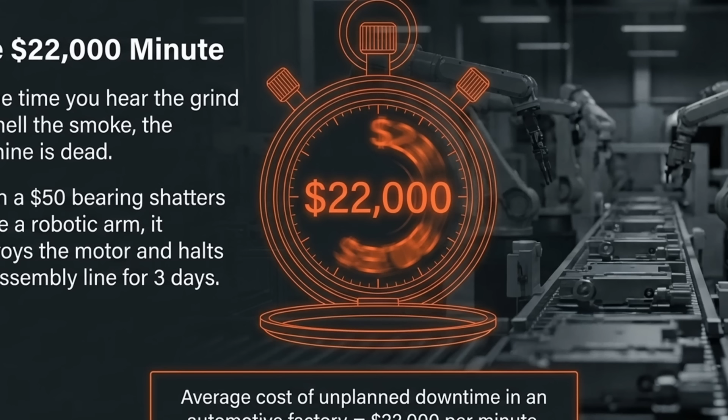single minute. But what if a machine could call a mechanic and order its own replacement parts 3 months before it actually breaks? It sounds like science fiction, but it is happening right now. Today, I am going to show you exactly how engineers are using acoustic sensors and artificial intelligence to let machines predict their own deaths, and why the old way of fixing things is bankrupting companies.

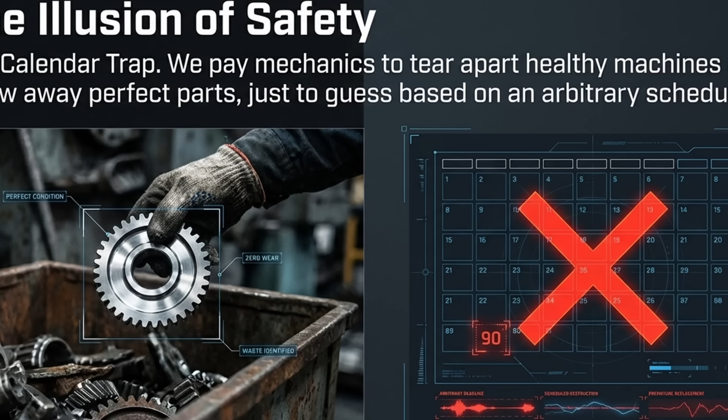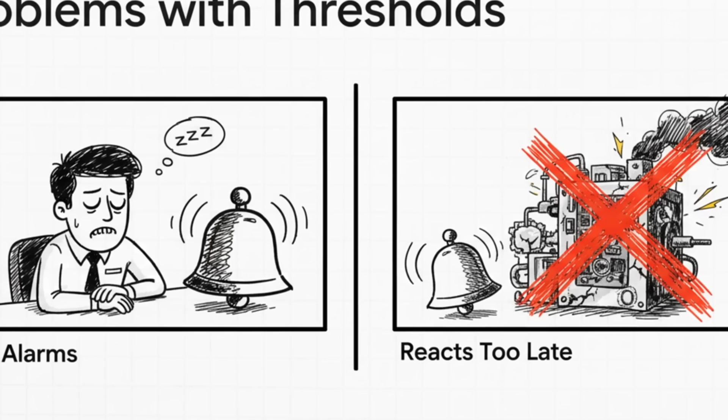How do most factories maintain their equipment? They guess. They use a calendar. They say change the oil and bearing every 90 days. This is called preventive maintenance and it is a massive financial trap. Why? Because you are constantly throwing away perfectly good parts. You are paying mechanics to tear apart healthy machines just to be safe. You are spending millions of dollars fixing things that aren't actually broken.

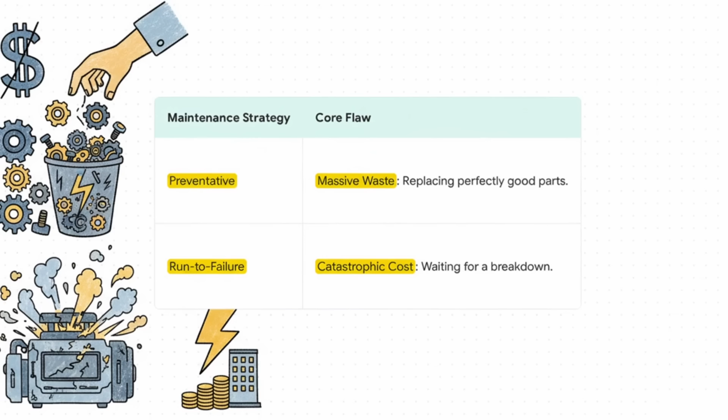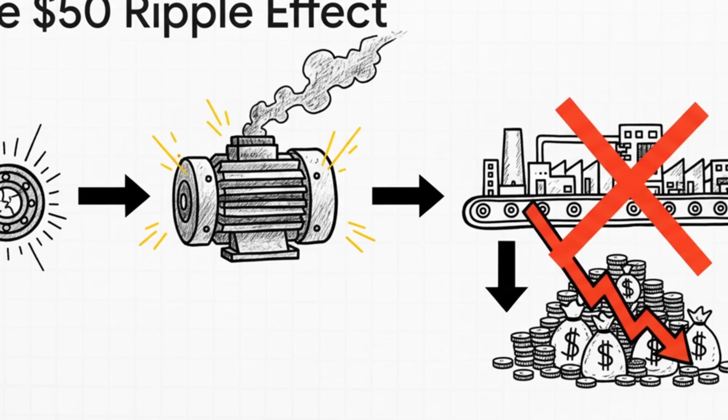But the alternative is even worse. The alternative is run to failure. You wait for it to break. But in an automotive factory, a single minute of unplanned downtime costs an average of $22,000. If a $50 bearing shatters inside a massive robotic arm, it doesn't just break the bearing, it destroys the motor, shreds the casing, and halts the entire factory for 3 days. You don't just lose the cost of machines, you lose the revenue of every product you couldn't build.

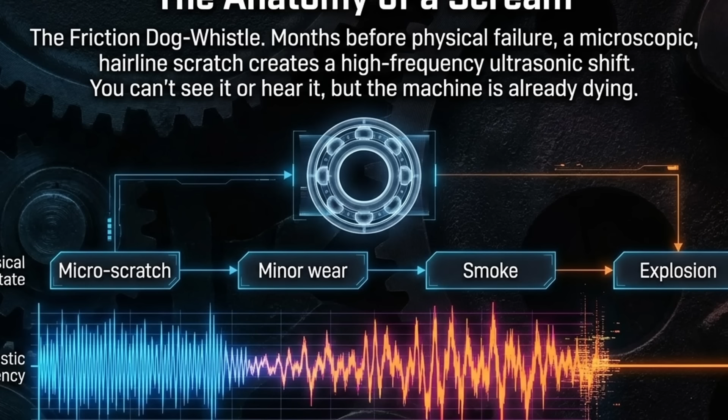We need a way to look inside steel while it's moving, and that is where the microphones come in. When a piece of metal gets a microscopic scratch, it creates friction. That friction emits a high frequency ultrasonic sound wave like a dog whistle. Engineers now attach ultrasensitive acoustic microphones directly to the metal. These sensors listen to the machine 24/7. When the machine is perfectly healthy, it hums a specific mathematical baseline tune. But the exact moment a microscopic scratch forms, months before it actually fails, the frequency of the sound wave shifts. The machine starts to cry.

But there is a problem. A factory has 10,000 machines, all vibrating at once. A human mechanic can't listen to a wall of noise and find one scratched bearing. This is why we need AI. The artificial intelligence acts as a digital doctor. It processes millions of sound wave data points every second and filters out the background noise. It detects that tiny 1% shift in a specific machine's frequency, then the AI cross-references that sound with a global database of broken machines.

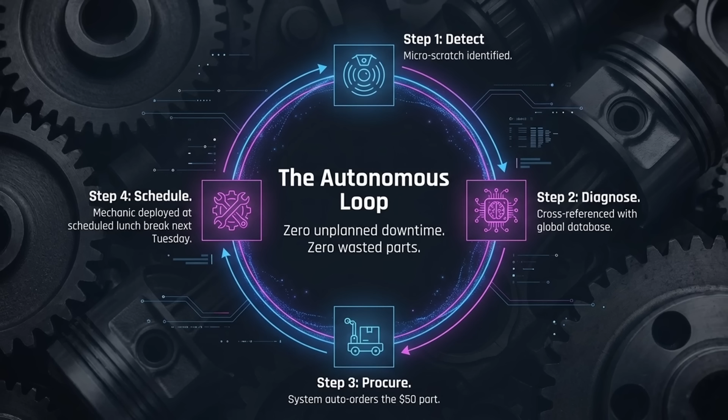The AI doesn't just say something is wrong, it says bearing number 4 on robot B has a microscopic defect. Based on the acoustic data, you have exactly 42 days before catastrophic failure. The system automatically orders the $50 part and schedules a mechanic to fix it during a lunch break next Tuesday. Zero downtime, zero wasted parts. The machine literally diagnosed its own terminal illness and cured itself.

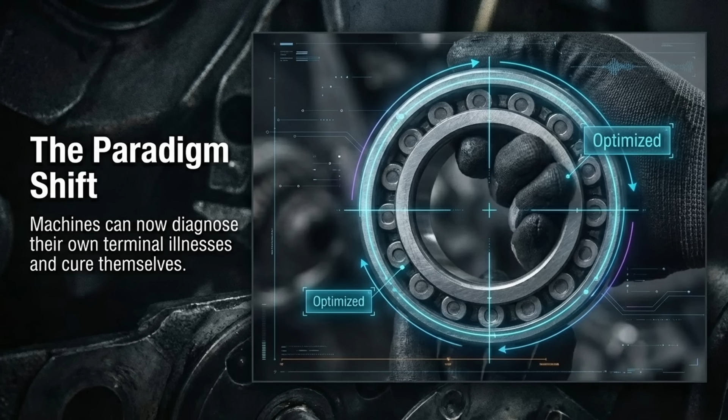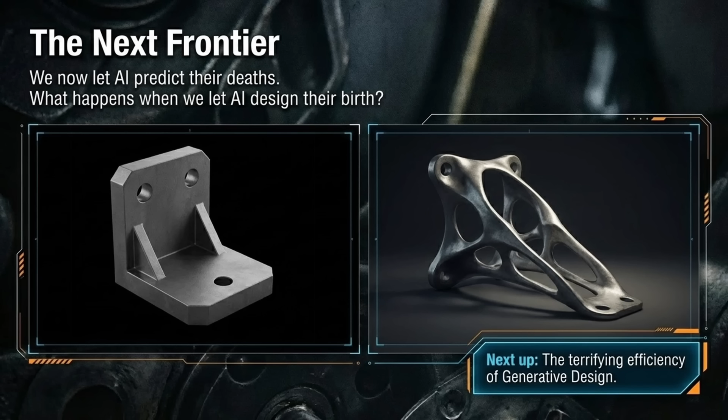So, AI can now predict exactly how a machine will die. But what happens when we let AI actually design the machine from scratch? The results look absolutely terrifying, like something out of an alien spaceship. We will see this in the next video and discover the mind-blowing world of generative design.